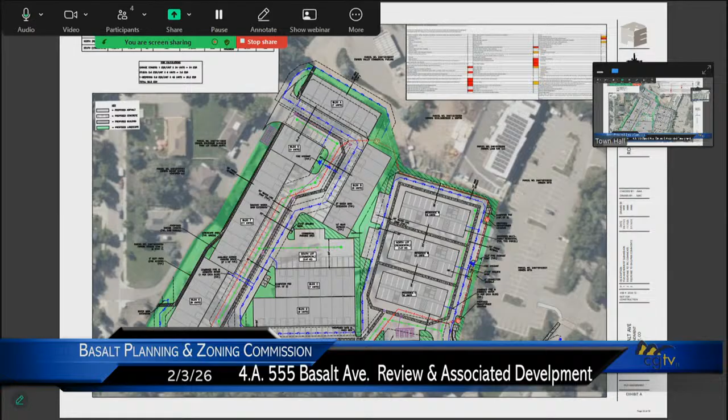The proposal, as was discussed at the last meeting, is to remove the existing buildings from the site and then construct 54 commercial storage spaces on the south half of the property, and 48 residential units in 3 residential buildings on the north extent of the property adjacent to the Basalt Park and Ride. Access is proposed for the commercial storage from the south side on Fiou Lane, as you can see here. Access to the residential is proposed from East Cody Lane on the north side of the project via this proposed driveway.

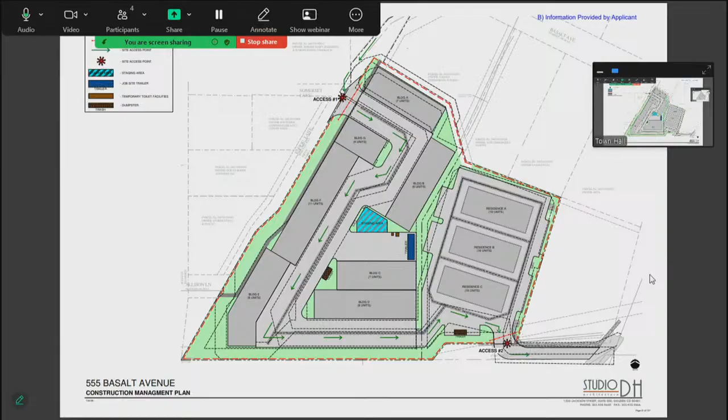As noted, there have been additional materials provided by the applicant at the request of the Planning and Zoning Commission. These materials are in your packet. They include a construction management plan that was requested by the P&Z. The construction management plan shows access for construction would take place from Fiou Lane and then exit onto East Cody Lane. Additional items included in your packet include a drawing of the access to Cody Lane, as well as the pedestrian connection that is proposed.

The P&Z asked for a detail on this to see where the pedestrian connection could sync up with the existing network. Basically, it's proposed to go to the crosswalk across East Cody Lane in this location. Additional materials included the existing conditions on Fiou Lane, and there's a drawing in your packet that shows the existing conditions and widths as well that are included in that.

The P&Z also requested revised elevation drawings that showed more visual interest. The applicant will present these updated renderings to the P&Z as part of their comments.

In reviewing the application, staff identified a series of discussion items at the last meeting. Staff will give updates on these discussion items and identify how some of the draft conditions jive with those discussion items, the first being consistency with the master plan.

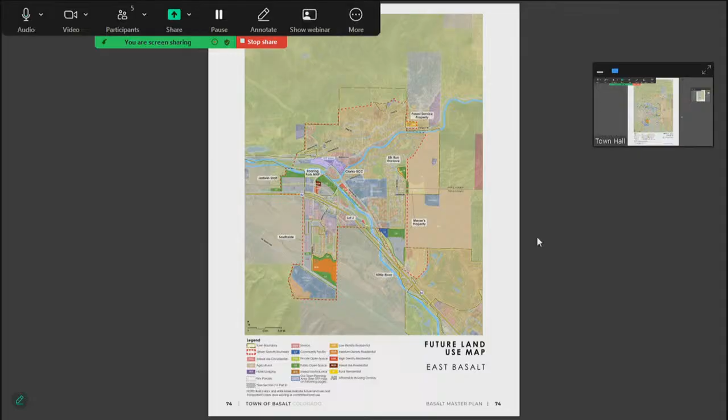As discussed at the last meeting, the future land use map has this property as existing land use, so it wasn't envisioned to be redeveloped during the life of the master plan. That would require an amendment to the future land use map. In terms of typologies, it is in the work mixed use typology, and the applicant has proposed to separate the residential from the commercial storage. The work mixed use typology requires them to be intermixed, so a typology adjustment would be needed as well.

Staff noted that they will bring back a resolution for consideration on the master plan amendments at the next meeting.

Other topics included the level of affordable housing mitigation. The applicants proposed for 12 of the dwelling units to be deed restricted as category rental units averaging a category 2. All of the deed restricted units were proposed to be 1 bedrooms in the original application, and the project proposed for 25% of the residential units and 25% of the residential square footage to be deed restricted.

The Basalt Affordable Community Housing Commission, BACH, reviewed the application since the last P&Z meeting and recommended that the applicant incorporate some larger deed restricted units in the project. The applicants have been working on an update to the application and will be going back to the Commission to address their comments and motion before the next Planning and Zoning Commission meeting.

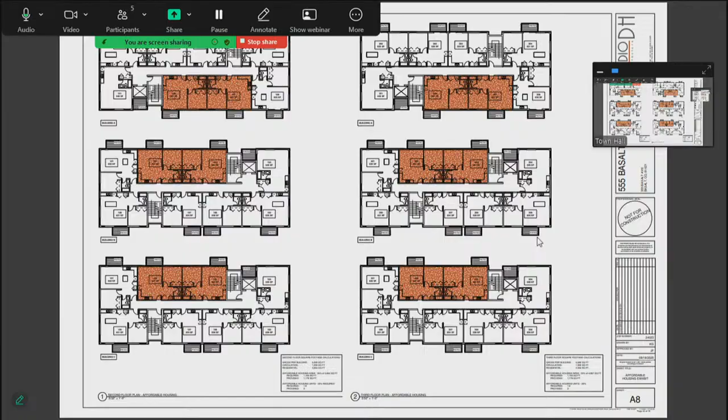That will occur before the February 17th meeting. Other topics included compatibility of use.

Storage use as well as accessory residential use are allowed uses in the industrial zone district, with residential being a special review use that requires approval by the Planning and Zoning Commission and Town Council. As noted at the last meeting, staff believes it's important that the storage use remain storage and not become a business facility. Staff has included draft conditions in your packet that would prohibit the use as a primary place for business for individual businesses, requiring that it remain storage.

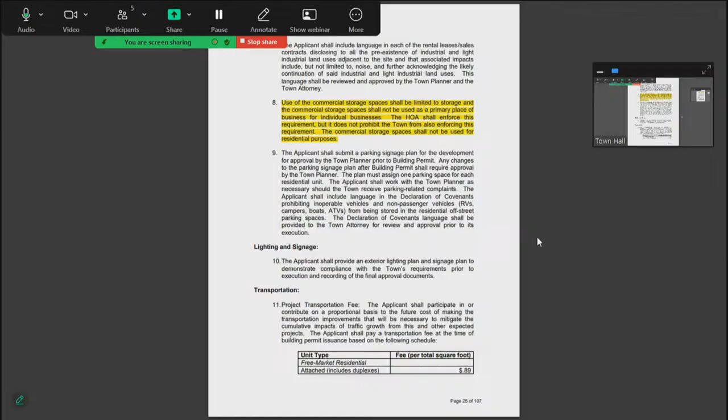Other topics included building height. The applicant has proposed a building height of 38 feet to the top of the parapet. The Basalt Business Center South PUD requires a maximum height of 35 feet, and this is being requested through a PUD amendment. Additionally, they've proposed the elevator overruns to go over the height limit as well.

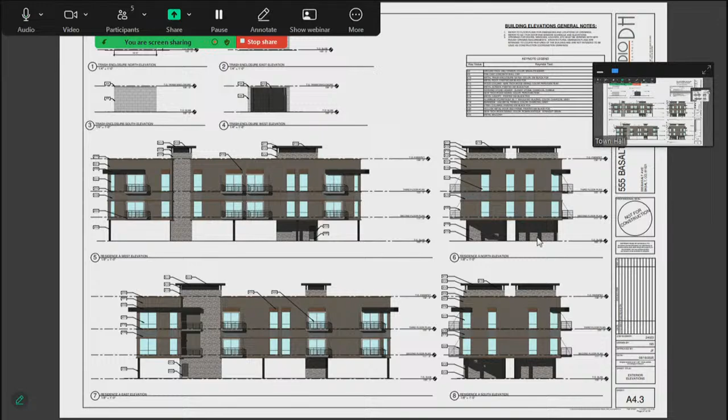There are other buildings in the area, such as the 525 Basalt Avenue building, that have been granted amendments in height. As the site is a PUD, they can obtain amendments through the PUD, but it also opens up discussion as to whether the height amendment is justified given the level of public benefit of the project, so that's up for evaluation. The applicants have revised the renderings and will present those as part of their comments.

Pedestrian connectivity was another topic brought up for review. As the site is near the RFTA BRT stop, it has an opportunity to act as a transit-oriented development; however, it requires a strong pedestrian connection to the BRT stop. Staff requested the applicant establish a pedestrian connection, and the applicant explored the possibility of providing one across the park and ride.

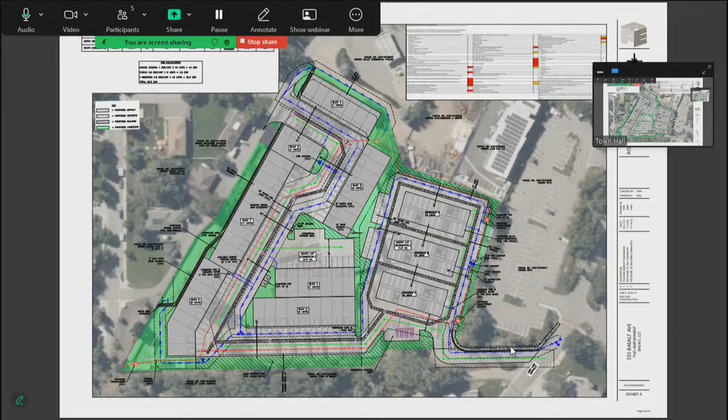RFTA was not supportive of that concept and instead recommended that the pedestrian connection happen on the up-valley side of the park and ride, adjacent to the access drive from East Cody Lane. The applicant has provided a drawing in your packet of that pedestrian connection and how it crosses East Cody Lane at the crosswalk. There is a condition that staff has added requiring that this sidewalk connection be provided as part of the project.

Other topics included Fiou Lane. As was discussed at the last meeting, Fiou Lane is on the south side of the proposed project, located between the Myers project and the Southside 4 subdivision. It currently is a two-way road that narrows down to the width of one lane at a couple of pinch points.

The fire department provided comments about consideration being given to widening it for a full two lanes of traffic in conjunction with the development. The applicant has proposed to keep it as it is, but has proposed an access path, a pedestrian access path, for firefighting abilities.

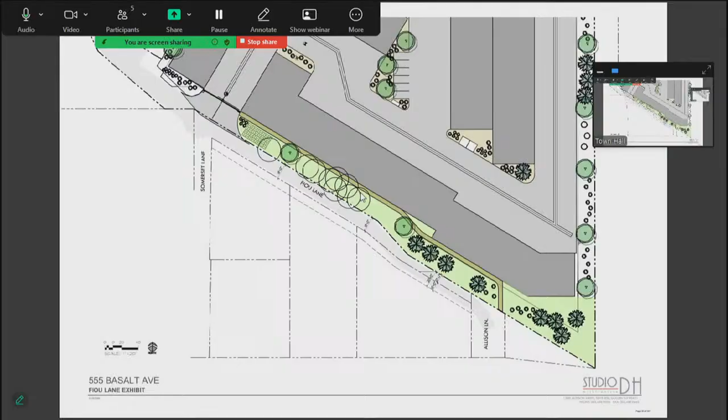Ultimately, this is a discussion of competing goals, as there are considerable mature trees along this area. However, staff went back and discussed the concept of a potential one-way option, and the emergency services, the town engineer, and Public Works are still supportive of widening it to a full two-lane road in that area. So there is a draft condition that would require it to be widened to a full two lanes as part of the development. That's up for consideration and discussion.

Other topics identified for consideration included the access road to East Cody Lane. As staff introduced at the last meeting, the access road to East Cody Lane is a sliver of property owned by CDOT, and currently the CDOT approvals only allow for five vehicular trips per day on that access. The applicant has made a request to CDOT to amend that, and we are still waiting for CDOT's response, so staff can give an update at the next meeting on that request.

Other topics included the traffic, as provided in the traffic report and discussed at the last meeting. The traffic report indicates that the development would not generate more traffic than the current Myers Steel operation, and that it wouldn't impact the Basalt Avenue Highway 82 intersection any more than the current Myers Steel operations.

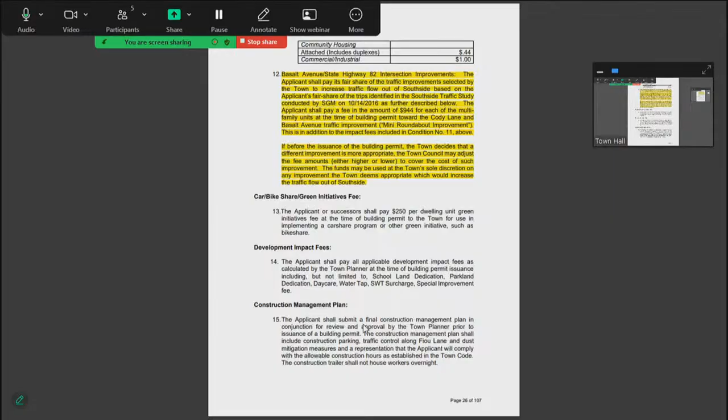Other discussion items included the south side floodplain. The south side floodplain is partially on this property. The applicants worked with the town's contract hydrologist, Robert Crable of Matrix Design, on the site plan so that it could be developed without increasing the base flood elevation on adjacent properties in the event of a flooding situation. They've done this by using tuck-under parking on the residential buildings so that water could flow through the site in a flooding event.

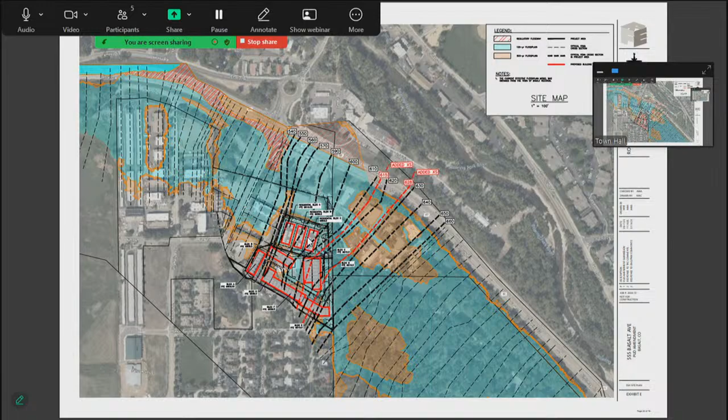Other topics included green building and wildfire mitigation. Staff has included a condition in the draft conditions requiring compliance with the sustainable building regulations as well as the wildfire mitigation requirements in place at the time of building permit. As discussed with P&Z at the last meeting, the wildfire regulations are going to be updated, since the state is requiring an update to local municipalities' codes to comply with new state legislation passed about three or four months ago.

So in total this evening, staff would recommend that the applicant consider applicant comments, that the commission also consider comments on the traffic study from Jim Charlier, if he's jumped on—I didn't see him yet, but hopefully he does—and then take public comments, provide commission discussion, and we'd suggest holding off on the affordable housing related discussion until Bach has finished their review. As I noted, they made recommendations, and the applicant is in the process of responding to those. And then ultimately continue the public hearing to February 17th.

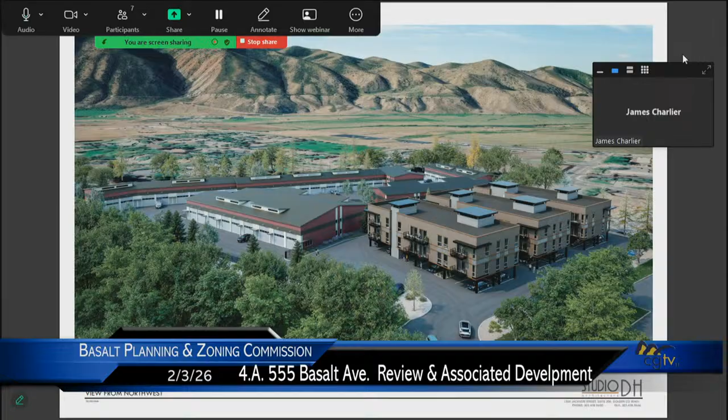So go ahead—we're going to have Curtis jump on since it's fresh in mind. Curtis Rowe, our traffic engineer who did the traffic study, spoke at the last meeting. He's on, and we'll let him mention any items regarding what James just talked about, then jump into our other discussion comments.

All right, thank you. Hi Curtis, if you'd like to speak please unmute and address the commission. Yes, hello everyone, good evening again. I'm Curtis Rowe, our traffic engineer. I prepared the traffic impact study for this development.

So to go through those comments, I really appreciate Charlier and Associates, Jim, and his comments for this study. We addressed those comments in the updated traffic study, as well as providing a comment response letter. I think the biggest point was the 3 days of counts.

We selected a typical average workday that had traffic occurring at Myers Company, which is representative of the volumes we expect on a day-to-day basis. That was confirmed with the applicant, so it is a representative count. Counts are expensive—they cost $2,000 per day—so we want to be careful when doing those counts to pick a good time so that we provide representative, accurate data for that count.

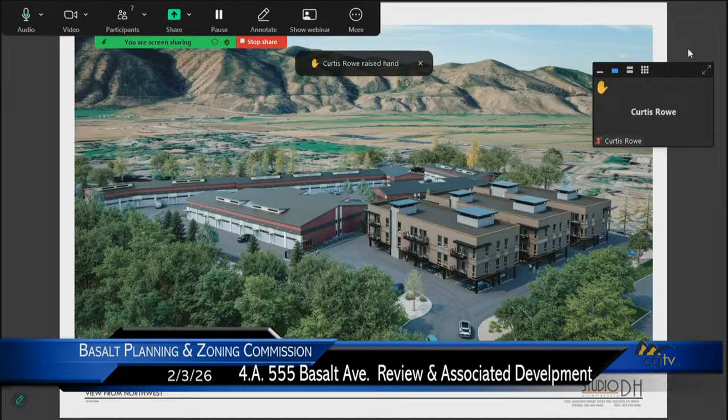The first image you're seeing is an evolved rendering, more photorealistic, looking at the materials we'd be proposing to clad these buildings in. You've got the single-story garage condo personal warehouses on the left-hand side of that image, and then the 3-story residential with the tuck-under parking.

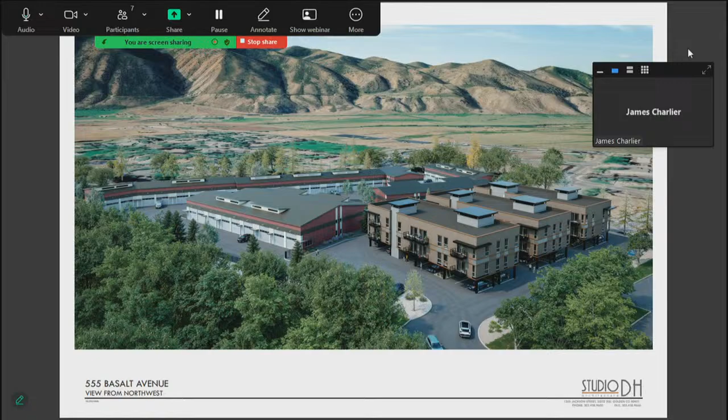We've looked a lot at projects like Tree Farm and Hoffman and some of the new developments around here. We've used a wood-look siding that's a little longer lasting than typical siding, along with stacked stone and different metals, and provided banding and daylight into the storage units, along with steel balconies and canopies that wrap around the residential. That's our update to architectural design since our previous meeting, with a little more clarity. We have more renderings forthcoming as we work through this design process. It's currently at that schematic design, conceptual design level, as we evolve through the process.

The next two items on James's list both had to do with affordable housing. I just wanted to touch on those two items. Since our last meeting, we went in front of Bach and talked through the unit mixes and the storage provision.

We've been working to revise our unit plans to provide a 2-bedroom unit along with 1-bedroom units and a 5x10 storage unit for each of the deed-restricted housing units. That results in losing a unit from each building, so we go from 48 total units down to 45. That does not reduce the number of deed-restricted housing units currently—we would still be providing 12 units. We're working through those plans and will be presenting them to Bach on February 12th for their review and response.

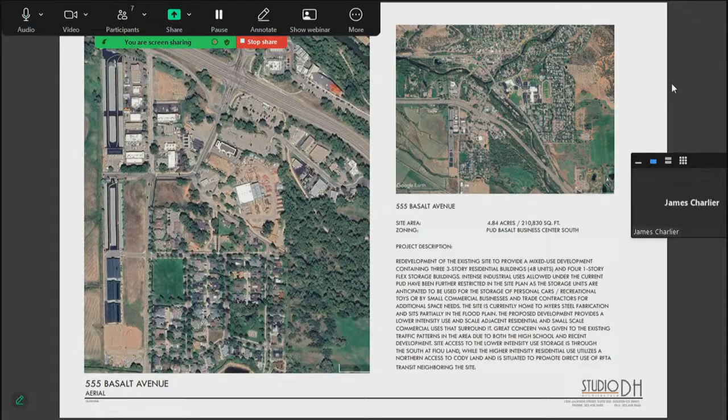With the reduction in units, we're also looking at a slight reduction in traffic count. We've got the aerial here from the last meeting, just for reference of both the Basalt Business Center South neighborhood and the regional context with Highway 82 and its proximity to downtown.

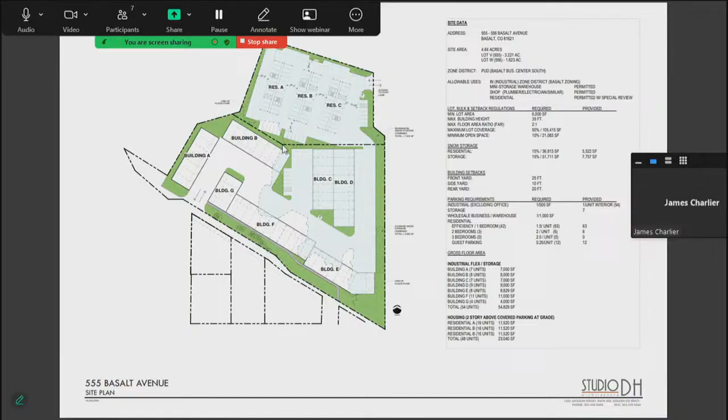These tables have been updated to show that with the reduction down to 45 units, our parking requirement is reduced to 81 spaces—1.5 spaces for each studio or 1-bedroom, 2 spaces for each 2-bedroom, and 0.25 spaces for guest parking on the total of 45 residential units. Just a slight change as we've worked through those.

This just shows the current revision. The 2-bedroom unit is actually in the center on the bottom of that floor plate. We had 8 units per floor with an efficiency unit, which has gone away on this level, allowing us to allocate that square footage back to a 2-bedroom unit, and we'll have Bach review that further.

We are still hoping to maintain a category 2 level across the board on average, so there could be a category 1 or category 3 type housing unit available, but maintaining that middle category 2 on the 0 through 5 scale.

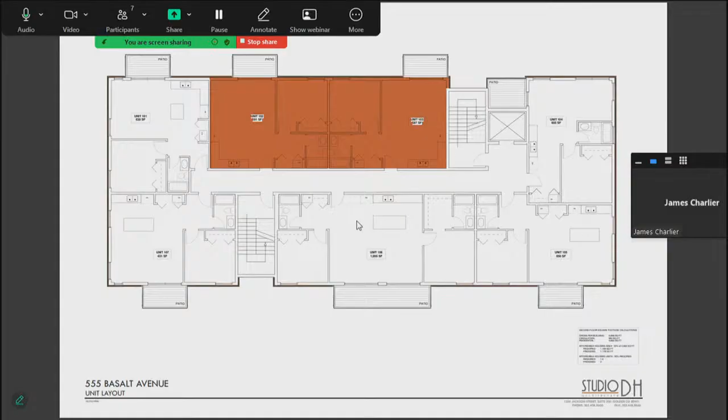Those were kind of the lower end uses that we thought could possibly fit in a warehouse type project, but we're open to more discussion on that. As we mentioned at the previous meeting, what we've been seeing with these projects is usually 70 to 80% are actually personal warehouses for people, for RVs, boats, ATVs, additional vehicles. That's what we've looked at when we consider traffic counts and restricting uses, basing it off the table currently allowed in that district.

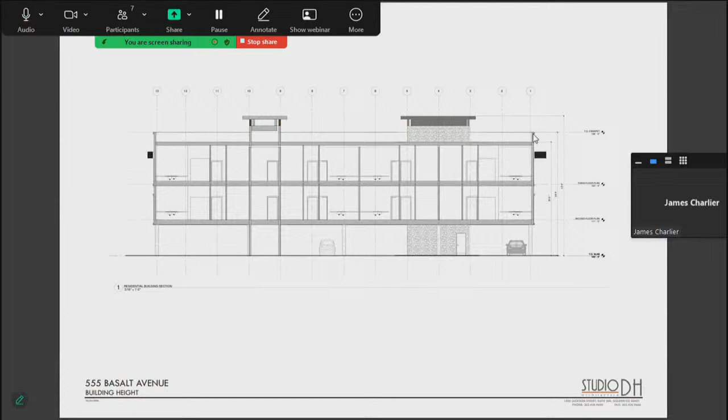This could be reduced down slightly. Right now we feel it is in line with how the zoning code measures a building. It allows for an elevator overrun and would allow for that additional height on the parapet. It's really the zoning code language versus the PUD language. It also provides for a little bit more generous height in the housing units to make them a little nicer, we feel. It could be compressed some, so I wanted to get you guys an exhibit of that to look at.

We'll jump to the next slide. So this is jumping over to the Cody Lane access. This would be the primary residential access, and these are the photos we looked at during the last meeting.

We have the CDOT access easement that does allow for a sidewalk in that property. We've researched that. We do have some existing site infrastructure we'll have to deal with to install that sidewalk. Mainly we've got a drainage ditch, and then you can see in the top left picture, we've got a USPS mailbox and an electrical transformer box that will have to be dealt with.

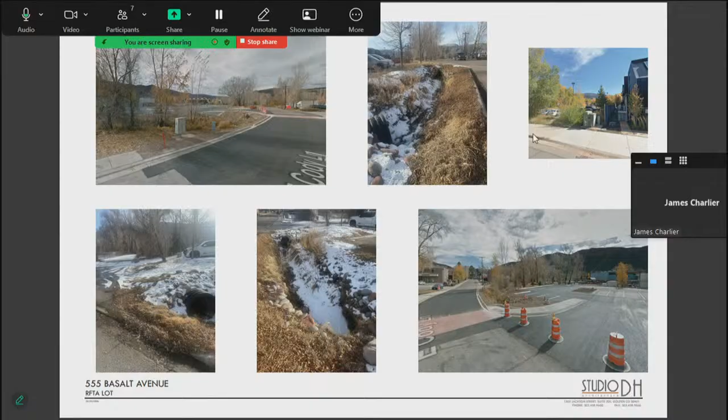I'll jump to the next picture, and we bumped up the property line weight on this a little bit heavier. So you've got the red property line, the RFTA parking lot to the top right, the CDOT access to the bottom, and the Myers property 555 to the left. There's a slight dashed line in the corner down there, and that is an agreement between RFTA and CDOT for the access agreement to access Cody Lane.

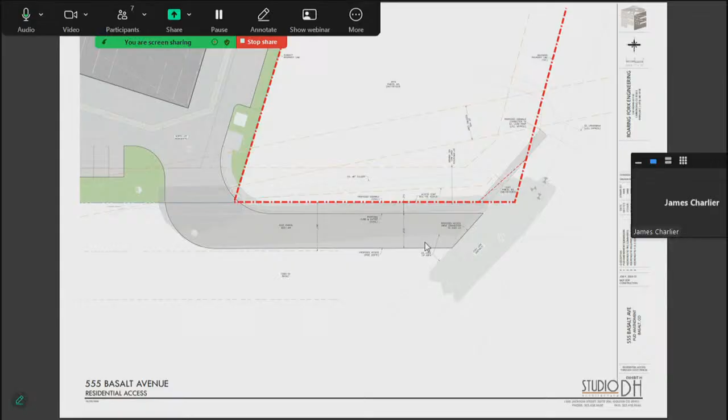And so that is kind of how we're bending that sidewalk around in the other exhibit that was in the packet. Jump to the next. Okay, these are the photos we showed you last time for reference on the Fiou Lane existing conditions, and then we'll jump to the next.

This is the exhibit that we enlarged and James showed you in his presentation. So all of the line work, the black circles, are the existing trees that we're proposing to keep. Those were based on the tree report done by the arborist, which had 50% or more life, and also those are some of the largest trees in the area, so we're trying to preserve what we can there.

You'll see that there's about an 18-foot width in the first part of Fiou Lane, from property line to property line. There is a dashed line, which we believe is an access easement on the southern properties, running on those three properties there, but then the property line narrows down, and you see there's a 10-foot setback between the property line to the south and the 555 property, and then another 10 feet for that access easement or setback.

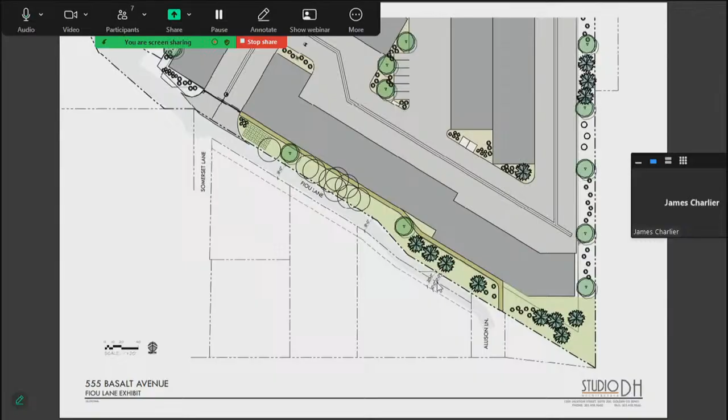I think there's been a lot of comments and multiple meetings about this. We're open to different options, whether creating this as a one-way or expanding it somewhat to allow extra width, especially down towards Allison Lane, depending on comments from commission and the town. If there was a desire to take some of that property, the applicant would want to make sure that doesn't impact setbacks or reduce setbacks affecting building location on the proposal.

Jump to the next one. This is just the floodplain exhibit. Again, the change to the grading and building layouts results in the main southern warehouse building being out of the 100-year floodplain. The buildings we're calling C and D, to the eastern side of the storage, and the residential properties remain in the floodplain. The reason for lifting the buildings up is to let any potential floodwaters pass through underneath the residential buildings.

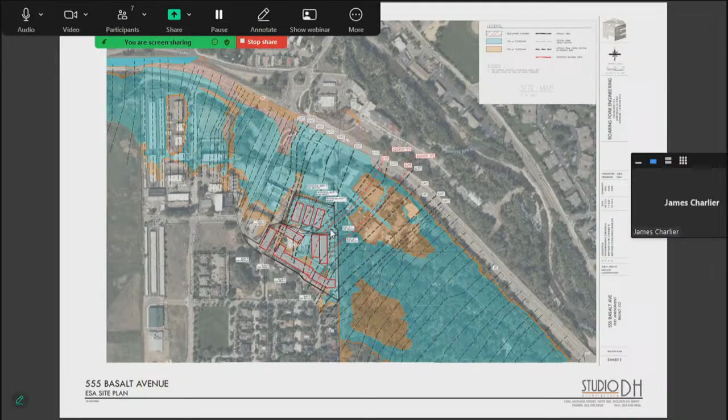We'll jump to the next one. An update on CDOT: CDOT was accepting of our traffic engineer's traffic study and traffic letter regarding the access easement. As James mentioned, currently it's for 5 trips daily. We're requesting it gets increased to use that as the residential access and push the residential traffic out to Cody Lane and then to the roundabout to Basalt Avenue. We're just waiting now on their approval of that increase. They have not requested anything more at this time, but they've been accepting of all the studies and letters we've provided.

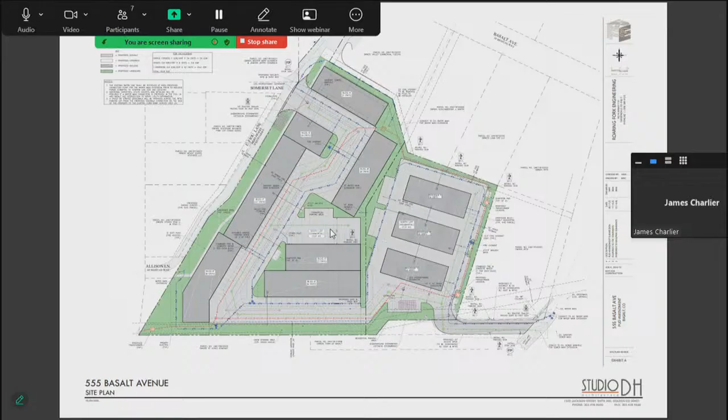Okay, we'll jump to the next one.

I'll touch briefly on this construction management plan. As requested at the last meeting, we spoke to a couple of general contractors. This project has not been awarded or assigned to anyone specific, so this was their first take on how they might access the site. The thought process was to have access come in through Few Lane, because of concern about heavier traffic equipment backing up at the roundabout to turn left onto Cody Lane, with such a short runway to get into the site. Their first proposal was to go to the next roundabout or intersection and come through that access, but push traffic out through the Cody Lane access. Again, this is one general contractor's first take. They would have staging areas and a job site trailer basically in the center of the project, with two trash dumpsters on either side, one for residential and one for the storage warehouses.

There is the possibility of phasing this development depending on construction window or timelines. We're also proposing a property line between the two so that a separate developer could do either the residential or the storage, or they could become separate projects. This would allow for a shared job site trailer, or back-to-back trailers, depending on how they chose to proceed or phase this project, and access gates near both.

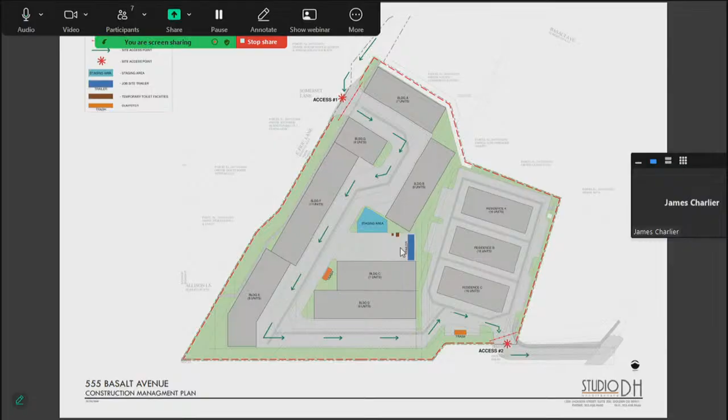I think those are the major items we wanted to touch on. We are aware of the wildfire mitigation and green building design standards and are planning to implement those. We've worked through things with Public Works, Basalt Sanitation, and Roaring Fork Fire regarding the buildings being fully sprinkled, using fire-resistant or fire-hardened materials, and the current water line access and how we best accommodate that with existing conditions. We have the civil engineer who did those designs here, and the applicant, and we're ready to answer any questions.

All right, thank you very much. Let's do some commissioner questions. Bob, would you like to start?

Sure, my question is on the traffic study. I want to make sure I'm clear on this. Currently, all traffic is coming and going through the west side of Few Avenue, correct? That's correct. And then it's proposed in this design that you're going to have traffic for the self-storage in a similar location, but all the apartment dwellers will have access through Cody Lane, correct? Yep. So we need to realize that much of the traffic issues for Few Lane are reduced.

Correct? Two-thirds, three-quarters, 90% of the traffic is now going to be coming through Cody Lane. Yes, the higher intensity use of the residential, just because you've got 45 units, would be going out that way. There is a gate separating the properties. The gate would have a Knox box access for fire department emergency to go through the properties, but the residential users would not have that access.

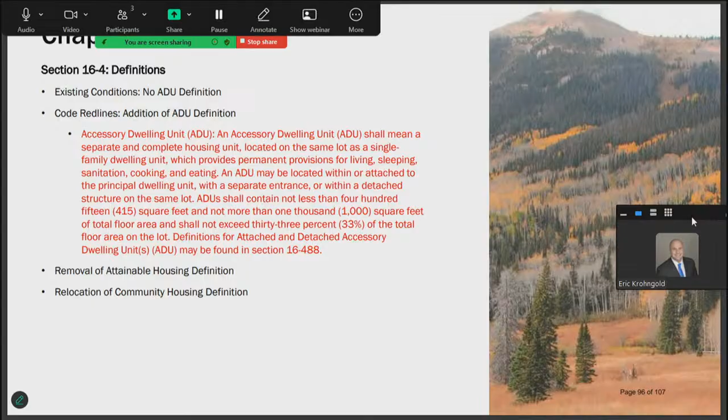The first major change was to Chapter 16, Part 1, relative to the definition section. Currently there was a definition section out of place in the code, so we brought the ADU definition into the section and updated it to be in line with some of the other dimensional requirements we instituted elsewhere in the code. We also relocated the community housing definition to this section, as there was some confusion with the different definitions.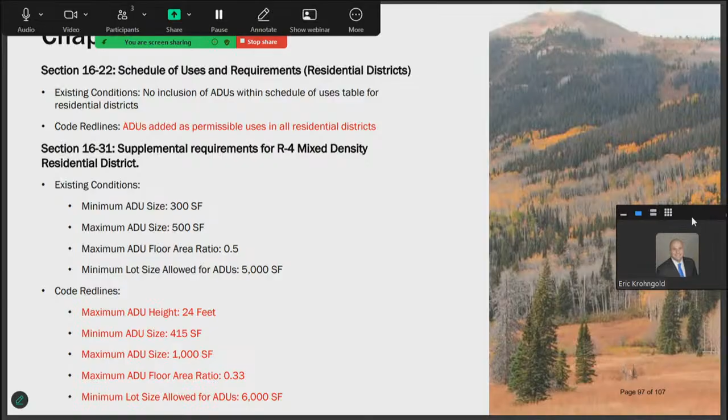The second major change is Chapter 16, allowing or adding ADUs as permissible uses in all residential districts. Additionally, in section 16.31, we made some changes to the dimensional requirements for ADUs, giving a little bit more leeway in terms of maximum ADU size, and also addressed the floor area ratio for lots allowed for ADUs.

One of the biggest changes in our guidelines was to Chapter 16, Article 4, Section 16.65, the PUD amendment approval process. Currently, adding an ADU to an existing PUD would require the applicant to go through a rather arduous process, with review by the planning and zoning commission and town council. Through our discussion with staff, we implemented guidelines that classify ADUs as either an insubstantial or substantial modification.

Accordingly, they would be subject to administrative approval if they stayed within the PUD, approved so long as the applicant and the ADU conform with the adopted PUD standards being built. This also granted an off-ramp in cases where there was murky conditions or uncertainty around the ADU's conformity with the PUD standards, whereby they could push it to the planning and zoning commission for further review and recommendation. Really, the goal for this guideline was just to try to ease the process overall and take some uncertainty out of it, to try to increase production within the community.

Next slide, James. We wanted to really consolidate information to make it easier for applicants to find requirements for ADUs in the community. We wanted to add additional clarity for folks, and really just create some additional pathways that hopefully can increase production in the community.

Finally, I'd like to start to set up a framework for an optional ADU grant and revolving loan program. This was something that came out of our program recommendations memo that we shared with town council last year. So some of these guidelines will expect to set that framework. Next slide.

The next section provides additional definitions. Here we reference section 16-412 where we relocated the ADU definition. We also added additional definitions for both attached dwelling units and detached ADUs, or detached accessory dwelling units.